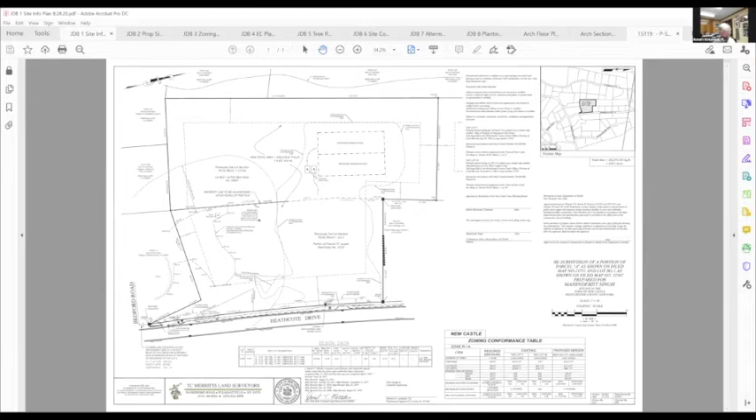Okay, so we're here. Jerry, do you want to, or who on the team wants to lead off and bring us up to speed? Brad, do you want to do that, or? Terrific, Mr. Chairman. I'm glad to do that.

And good evening, everyone. Good to see you. For the record, Brad Schwartz from Zarin and Steinmetz, representing Dr. Singh, and I'm joined tonight by Dr. Singh and his full team. Mr. Chairman, I will turn it over to Jerry in a minute or two to present the plans in detail. I just wanted to spend a minute reminding everybody where we left off at the July meeting.

The planning board had asked us to look at moving the house forward towards Heathcote, and we've done that. The house is now 30 feet closer towards the road as the board had requested. It's essentially in the same location as where the board had approved the location during the TAVO application about 2 years ago. So we're following the prior precedent that was established by the planning board during the TAVO application. And Mr. Curley had also asked at the end of the meeting that we also respect the same clearing and grading limit line restriction that was previously adopted for the Bukowski application a couple of months ago. And we've done that too. So there's no clearing or grading within the 50-foot rear yard setback.

We've come tonight with this plan, really trying to put our best foot forward. All transparency with the board, we had initially considered moving the house forward just 15 feet, and we thought that might accomplish the same objectives. We met out in the field with one of the neighbors, did some more internal review and listened to the feedback, and considering the TAVO application, we just decided to come back with a 30-foot difference tonight. We didn't want to come back and talk about 15 feet tonight. So again, we're putting our best foot forward, and we hope that the board and the neighbors are all pleased with the updated design. So Jerry, if you want to take the board through the plans in greater detail, I'll turn it over to you.

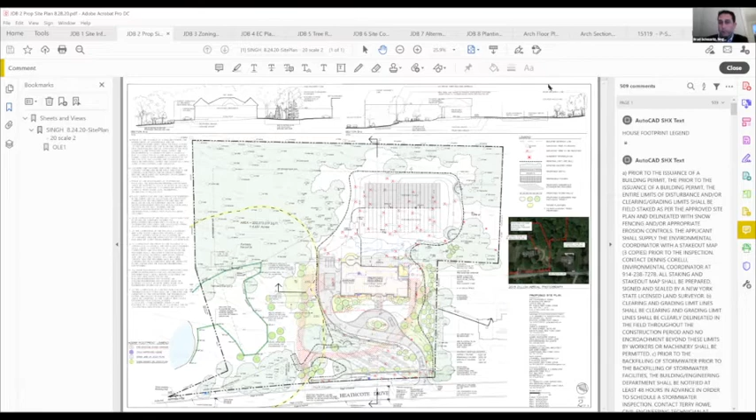Thank you very much. Okay, so I think, Brad, that was a good summary. I think that last time with the board, we had made some progress, and in the end, it came back to this 30-foot thing. So what we did was, the last time the board saw the project, the location of the home was in this area, and we've moved it up to the 30 feet. And I tried to make that clearer on the zoning plan. So the zoning plan, we've keyed the home locations. So where we are now, of course, is this highlighted plan. The Tavo plan is in this B, this D and B. So you can see they're kind of overlapped on each other.

Last time we were with the board, we were presenting Plan C. We were back here, C and C. And of course, the original homestead was about this area.

So that's what we brought forward, working with Dr. Singh. He said, if you make it work, I'd like you to make it work. I'd like to be a good neighbor. I'd like to make sure everyone is comfortable. Just try to make the plan work.

So we worked it through several times. We had to explain to Bob and Sabrina the domino effect - once you move the house 30 feet forward, everything else has to move too. So we had to basically take apart the site plan and put it back together again.

So what we've done is we've kept our same curb cut location, and we swung that driveway. We had to tighten up this radius. It required about 125 feet of low wall - maybe 2 feet, getting to 4 feet in the middle, then back to 2 feet again.

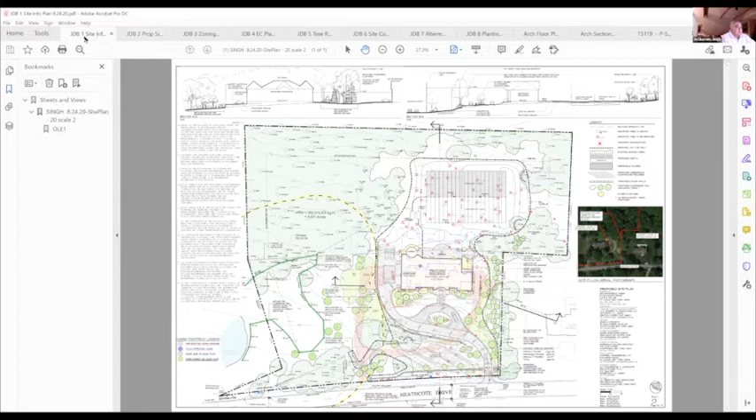When we were out at the site with the neighbor, we were able to take some views to see what this might look like from the neighbor's perspective, to try to be a little more sensitive. So we did provide some photographs of what the views might be.

So view number 4 is looking onto the property, and views 3, 7, and 6. These are the views - this is view number 6, the view to the Singh property from the adjacent property. This is standing with our back to the garage, looking at the Singh property.

There's already a little bit of screening going on there, which is good - it gives it a nice buffer. There's some nice tall trees, as you can see, that help frame it. We're keeping a big 48-inch maple back here, or oak, sorry. So I think we've got a nice high canopy of trees to kind of frame the view of the house, so it doesn't really stick out, but it's going to be framed.

And then, of course, we're filling in with fencing here, and filling in with all the plantings - the previously proposed planting plan that we had worked on and discussed with the board, where we've done quite a bit of planting here to create kind of a naturalistic hedgerow of various size spruce trees.

I think we go up to 12 to 14 feet in some areas, 10 to 12s, 8 to 10s. And then we mix that in with some smaller trees, some dogwoods and tupelos, and then some larger shrubs, the lilacs and the viburnums, all being that it's going to grow into a nice, dense, natural hedgerow, and then it ties into this big grove of natural trees.

Also, Jerry, wasn't there an architectural change where you moved the patio that was on the eastern side of the building and flipped it around to give a little bit more privacy to the neighbor? Sure, I'll get to that in a second.

So we still felt that, because we were shifting things around, we said, well, where is this fence really needed? And we felt it was really needed right here. So we still have 125 feet of solid green, 6-foot height fence, stained solid green. We do this quite a bit - we use that solid fence and stain it dark green, forest green. Once you put the plantings in with it, it really blends nicely and creates a nice screen. So we still have 125 feet of fence here.

This is just a view to natural area here, and this is pretty heavily planted here and here, and there's really nothing in here. We didn't want the fence, so we looked at it, and the fence stepping down the hill doesn't really look very attractive when these things, they don't rack very well on the hills.

Is that a wood fence or a plastic fence? It's a cedar fence - a solid cedar fence, stained forest green.

So the other thing we noticed, and we were trying to be sensitive to the neighbor - in the original proposed second floor plan, there was an outdoor balcony area. This was the original plan here. So what it was, it kind of opened up - there was a bedroom here and it opened up and you had this balcony. And when you looked out on the section, this would be, it's right here. So this was the balcony and it happened to be looking due north.

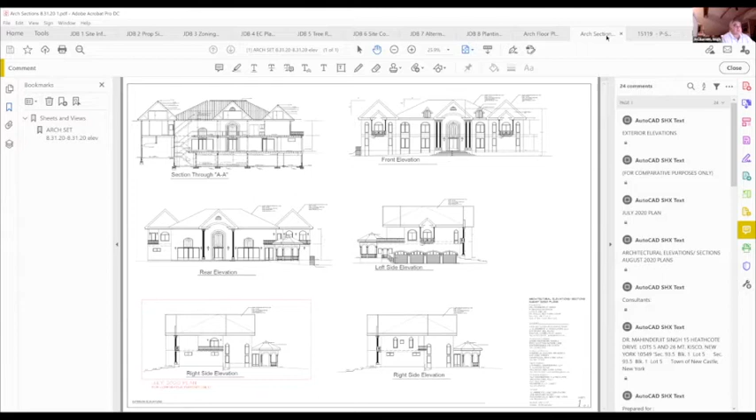And because we went 30 feet back toward the street, now we're looking right toward the Rodriguez backyard. So we said, well, why don't we work with Dr. Singh's designer, and said wouldn't it be possible if we could turn this and make it look out over Dr. Singh's backyard instead of the neighbor's backyard? And he went back to the drawing table and came back with this - so this is how it is now. Now you come out of the bedroom and you sit on the patio and look out to the backyard. This is how it was before - it looked that way to the north. Now we look only to the west. So I think that works better for everybody.

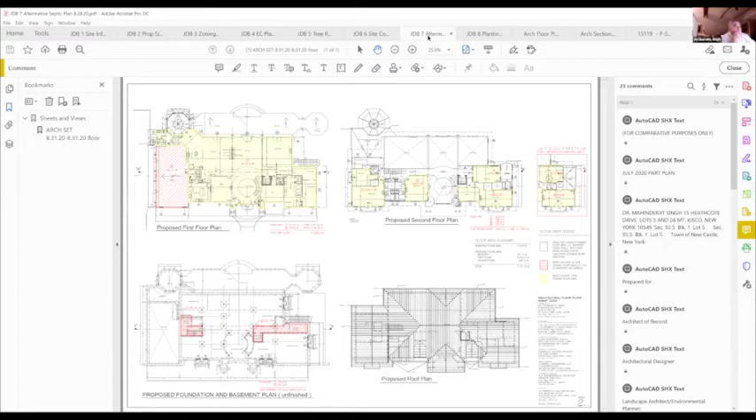Let's see - comparisons, we can talk a little bit about the comparisons. What do we got here? Jerry, you might also want to mention the location of the primary and expansion septic areas. Yeah, so...

This was the plan that we worked with the planning board prior on this, and this was something that was brought up - what would happen. When Campbell Engineering first did this, they had the primary here and the expansion area closer to the house. I think Michael explained it because that's where the locations of the holes were. But we can go back and do more holes, and we could switch things. So we went back and said, well, what if we switched it, and what would that do? If we did that, we would be able to only build the primary area here. And then we would be able to save all these trees in the back.

We would tighten up the grading limit line. So this would be the expansion area that wouldn't necessarily need to be built. We think it's a good candidate with the health department to allow that because typically they like to see you have access, and we have access coming right over the backyard and right to it. So I think it's a good candidate for that, and Dr. Singh is perfectly willing to do that.

Okay, so this is our site plan comparison sheet that we updated to show the new layout. We had been doing this right along with the planning board to say, this is what was approved at the time that TAVO came in, this is what is proposed now, and how does that change?

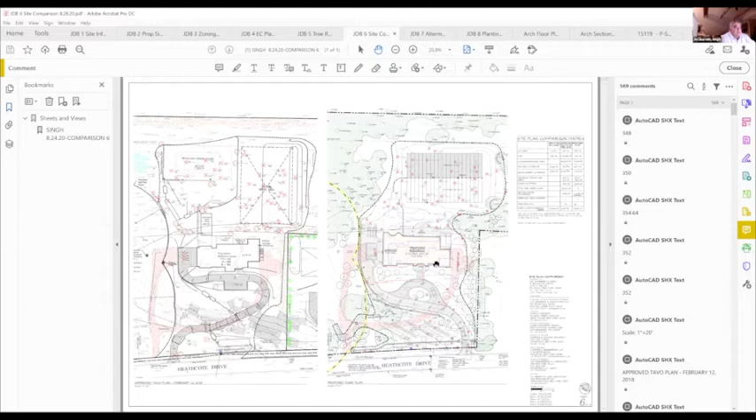One of the things you can see right off the bat is that we have a much tighter grading limit line. Theirs was much more extensive because they had the tennis court and the pool. So that was a significant change - we actually have less site disturbance than the last plan.

FAR, the TAVO plan was at almost 10.4. We're code compliant at 7192. Theirs was not. Clearing and grading area back then was 86.8, and we're at 71.2. So quite a reduction in disturbance area.

Our building coverage went up - we did go up with the building coverage, we have a wider footprint. Our development coverage, however, went down from 20,400 to 17,000. Our driveway length went down. Our house footprint went up. Of course, there's no tennis court and pool.

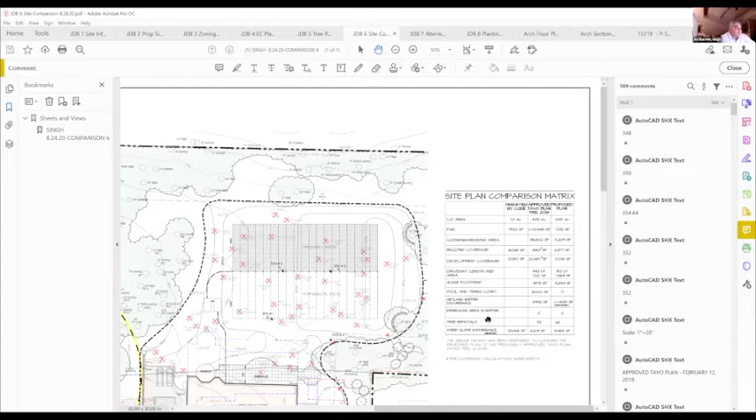Wetland buffer disturbance, ours went up slightly, and that's because Allen has to overflow - it's a wetland buffer disturbance. There is no wetland disturbance on either of the plans. What this area represents is where the infiltration chambers have an overflow, and he's got to get the overflow down to the grade so it flows by gravity and releases itself should they ever need to overflow. That's what this is. We consider that a temporary wetland buffer impact, because once that's installed, we're going to go back and plant that.

But our tree removals did go up over the TAVO plan, and since the last time this board saw the plan, it's a couple more trees for the driveway. Our steep slopes disturbance actually was reduced, and that's because our driveway approach didn't take up as much of the steep slopes.

So Jerry, where are the additional trees being cleared from? Why is that? It seems like most of the impacts are less, so I'm just interested in knowing where that is coming from. So what happened was when we moved the house forward - again, that domino effect.

I moved the house forward, so I had to move the driveway forward. Previously, the driveway came in like this, and it tracked here, and then swung in and came in. But now the house went 30 feet forward, so the driveway went 30 feet forward too. And then I clipped this 6-inch hickory here, and I think this is a holly over here. So I hit these two trees because I moved the driveway forward. I don't think either one of them are great specimen trees, but it was unavoidable.

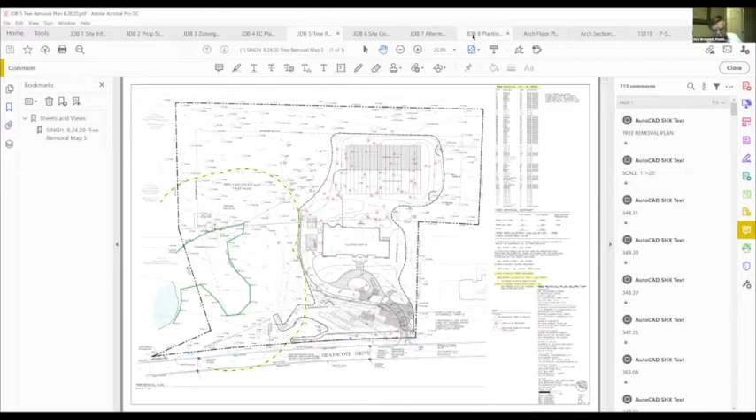I see, okay, thank you. But we have a lower tree count for at least the short term, maybe 20 years or so, because we're going to build the primary septic system closer to the house as opposed to farther away, correct?

So Jerry, I'm confused about what the application is, because you did show the alternative - I thought you were saying you could do that if you got the approvals. I think that's the one we're saying we prefer, especially because of the point Dick just made about saving maybe 10 trees. If you take the one in front as the primary and hold off on the one in back, maybe you save less than that. But I'm confused about what application you're asking us to approve.

Which plan is it? Well, I talked with the septic engineer, Michael Campbell. He cannot go back to the health department to finalize the septic plan until we have the merger of the lots, so he's waiting to do that. Then Michael Campbell needs to get approval from the health department to allow this. Typically that's after the planning board grants an approval, then he'll go back and make that request. And if granted, which we think it will be, then we will build the preferred plan. I think it's to everyone's benefit to do it.

So I think we have to go forward in the permit process with this board with the whole plan. And if we get that waiver from the health department, then we can move forward to the preferred plan. But where's our protection in that? Can we memorialize that in the application, how do we protect ourselves in case something happens? Mr. Curley, that could be a condition of approval - seeking health department approval for the plan that your board approves.

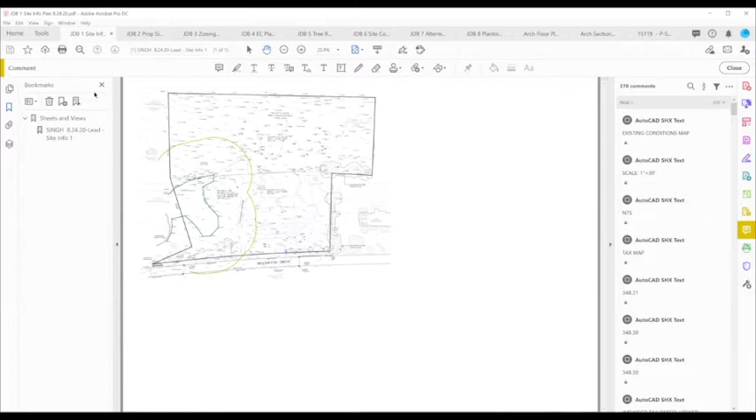That might be helpful for a visual, and that photograph that was on the plan. So let me just blow this up a little bit.

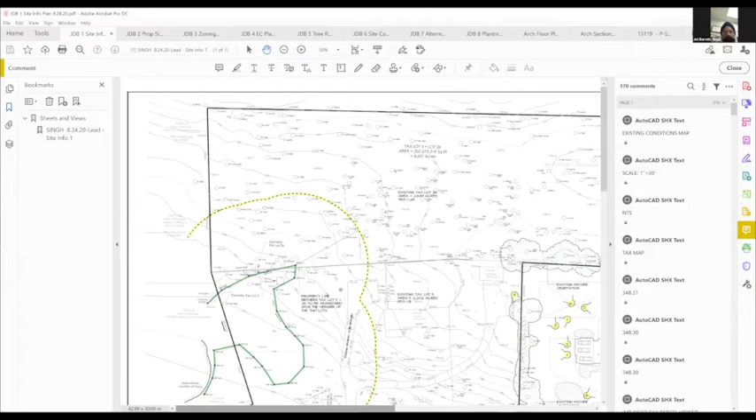So the fence would start right behind that first tree, and the new home is right here. So that was the idea. This group of trees right here, right where this hedge ends, that's where these groups of trees are, and this is where that opening is. Just to give you guys a sense of scale, ladies and gentlemen, excuse me, this is a 6-foot person standing here, so these are big trees.

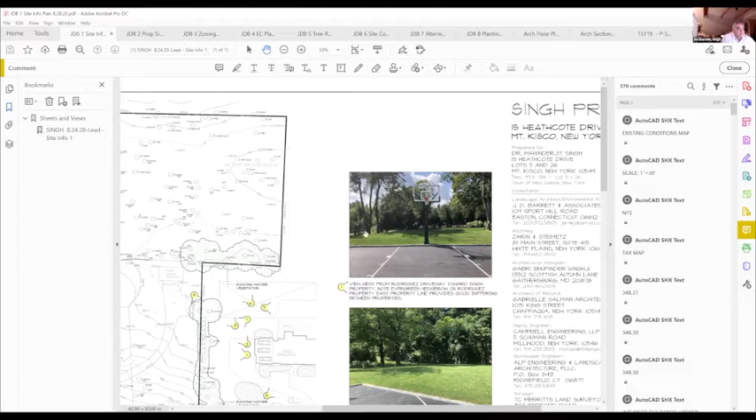So when I talk about the existing trees providing that sense of framing the home and that established look, that's what I'm talking about. We've got some nice trees, but this is the hedge, and we thought that this was pretty much screened. The driveway is going to peel in this way and go out that way. So that's why we started the fence here, because you do have this nice evergreen dense screen there.

Plus, if you put a fence up there, you might actually block the sunlight on those trees, and you might start to lose some health on that one side. That's a good point too. The sun is tracking from the south. Right. And thank you for that.

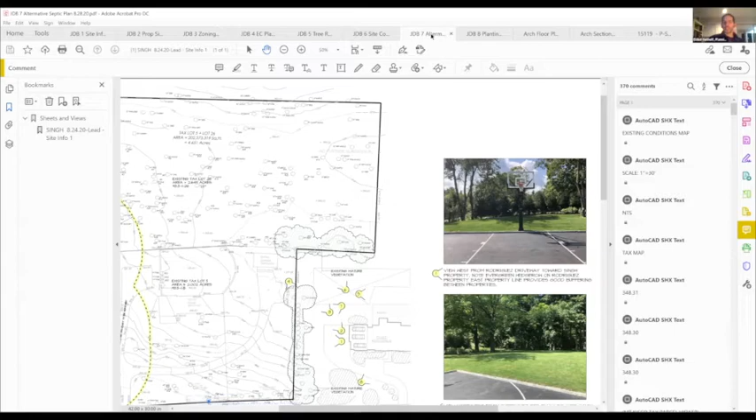The second question I have is possibly an internal question. We're talking about approving the preferred septic fields plan, and if the applicant can't get the approvals they want from the county, they'd have to come back to us to get approval on the other septic fields plan. Is there a way we can—I think we're all on the same page that were that to happen, we would approve it at that point—is there a way that we can just approve that now, sort of like a ranked choice voting sort of thing, that we approve both plans but really have a preference for this other one, and would implore the applicant to seek that approval?

Well, that's interesting. Sabrina, maybe you can help on this. First of all, if we have this approved and they come back and they have to, let's say, just clear additional trees, could that just go to Dennis and not to the planning board as something new?

I think that you would approve the max, we could write the resolution where you would provide approval for the maximum removal of trees, because your mitigation plan should reflect the maximum removal. And if in fact the county does approve of the alternate plan and not clearing of the secondary system, then the permits would still be valid. It would be less trees.

If you approve the plan that says that there will be less tree removal, then they have to come back for a new permit. In the past, we have approved the entire clearing, but the resolution notes that you want them to not clear the secondary system, and leaves it in the hands of the applicant in working with the health department and informing the town of that approval.

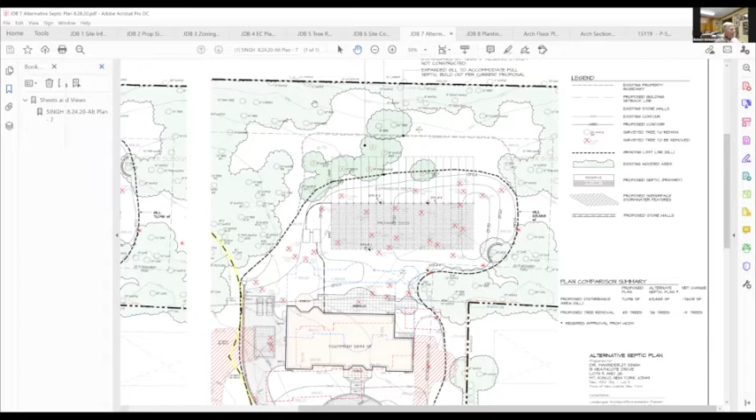In the meantime, as we think about that, are there any comments from the public on this application? Michael Surignano for the Rodriguez family. Thank you. Good evening. I represent Michael and Maria Rodriguez. They're at number 19 Heathcote Drive.

Michael was made to understand from Dr. Singh early on in this project that the front of Dr. Singh's new house would align with the front of the Rodriguez house. And in fact, as the board knows, this street, starting with the Rodriguez house on that side of Heathcote, every house going the rest of the way up the street are uniformly set back at about the same depth as the Rodriguez house. So the Rodriguezes were very concerned when the first iteration of this plan came before your board, because the house was way in the back, pushed up, and basically loomed over their backyard and was a real threat to their privacy and enjoyment of their backyard.

I'll leave it to Brad Schwartz or Jerry to give you the details, but it's my understanding that the house started to get pushed back away from the road as part of a zoning board discussion or variance application. I don't know the exact details of that. But as Brad noted in his opening, we did meet with Brad and Jerry Barrett at the site. Dr. Singh has acted in good faith here to try to accommodate our concerns. Certainly Brad and Jerry were receptive to my client's concerns. And we appreciate that they have now pulled the house closer to Heathcote by 30 feet.

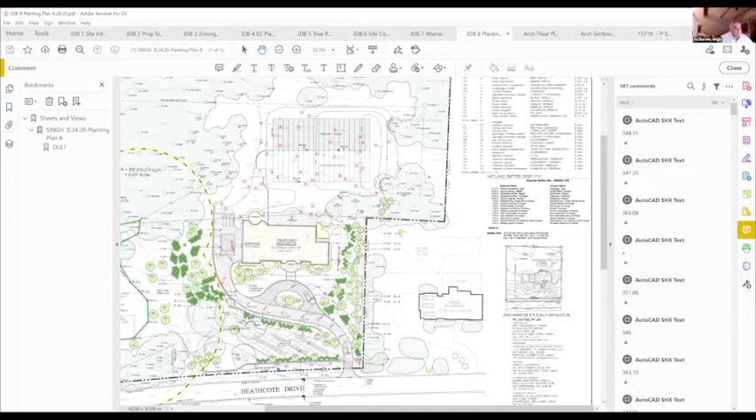We've tried to be sensitive with this. This is all planted in this area, and this is all permeable paving here, so the water's going to go right through it. It's something you could see is normal and customary in the neighborhood.

This is a parking area, a similar feature for the Rodriguez house, not quite the same, but it is kind of a parking area. If you look at the next house down, there's another one right there. So it's not an unusual feature, it's more of a common feature in these homes. Perhaps this is a little bit more elaborate, but also much more functional.

It's something the applicant would like, and we think it can work. We think we're still going to be able to get some planting in here and buffer this, we have quite a bit of planting in here. The Rodriguez has these nice evergreens, got to be a 30-40 foot hedge right now, and when we plant in here, I don't know that the jog is that much.

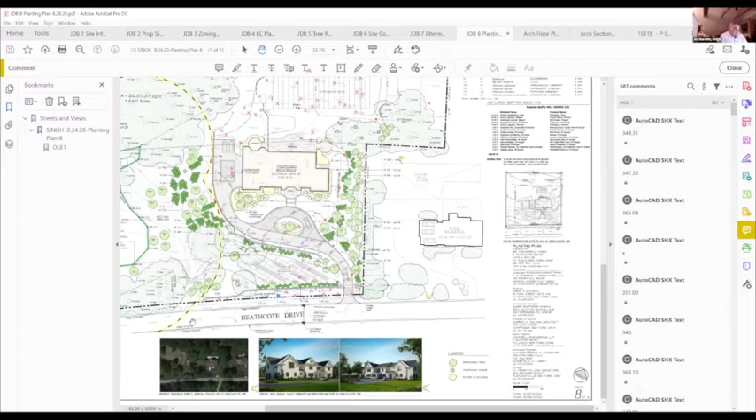Changing that architecture now to look out this way, the fencing, we think we've got a good compromise here, and I think I speak on behalf of Dr. Singh that we would respectfully request we keep that in the plan.

I would add, Jerry, that another feature from a privacy point of view, beyond the fencing and the rather extensive vegetative approach, is that you turn the patio so that instead of viewing to the Rodriguez house, the natural view and everything would be to the west, which is actually better for setting suns and everything.

Are you referring to this area? Yeah, we could certainly do that. I started a hedge here, and I could bring this hedge all the way around. This could be a 6-foot solid hedge. It would be a nice little alcove, and it would look right out. So we could certainly do that.

But we got a 6-foot fence here, we got evergreen trees, and I think there's a pretty good buffer here. But I think that's a good point, and I could certainly change this to an evergreen hedge that could wrap this and make a nice little alcove and private sitting area for reading, or a little nook on the patio with a nice view to his backyard.

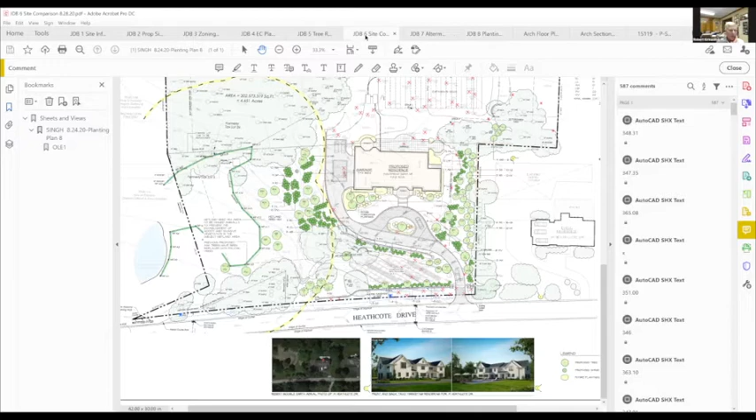So what would be the status of Dr. Singh or some future owner of this property's ability to put a pool or a tennis court in the rear portion of this property? Well, I think there would be a couple of protections, and that would be first zoning compliance. But very importantly, I think this board will be drawing fairly tight clearing and grading limit lines.

Well, and the other thing, didn't we do something with Bukowski that said no permanent structures are to be built in the back lot? Well, no, we didn't say that. We said that if there was going to be a future application, it would have to fall within those property lines. Remember with the other application, I think the property lines protruded over two sides over the neighbors, and certainly to one side far more extensively, with far more potential for development than we have with this lot. Dr. Singh's lot does, if merged, protrude over the Rodriguez property, but to a much lesser degree than the other application. So again, zoning compliance really would be a problem for any application for activity in that section.

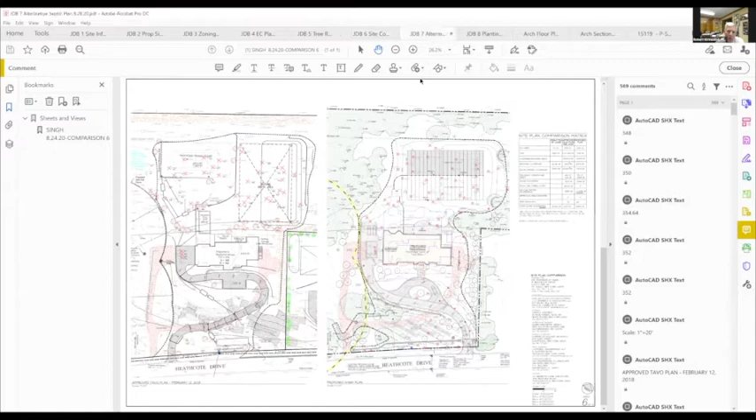Plus, we also have clearing and grading limit lines that we are drawing, and that will be memorialized on the plat. So I think those two issues would afford a certain level of protection. Certainly, the clearing and grading limit line would require a revisit to one of the boards for that application. So I think those are distinctions from what we saw last time with the other application.

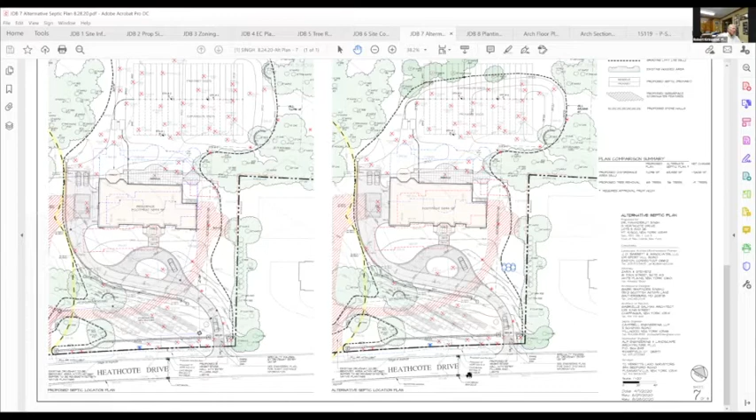And what we did there was, I can't do it myself, but we drew in the protection so it had to stay basically behind the home, and stay within the lot lines, the east and west lot lines of the property in front on Heathcote. All right, points well taken. Thank you, Mr. Chairman.

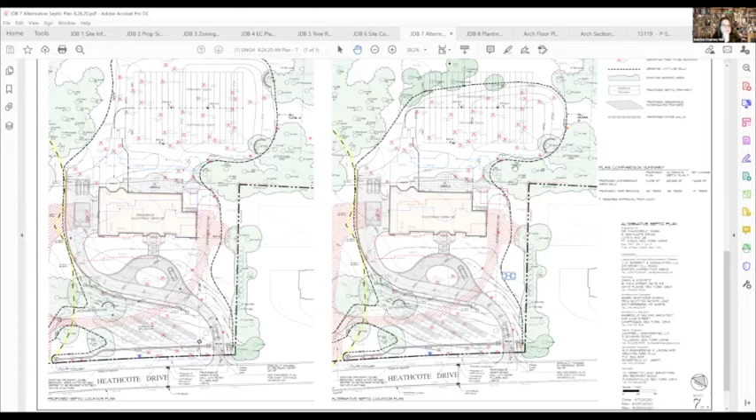Okay, we move now to our second item, and that's a discussion item on Lamini, Sorrel Street, can't find my agenda yet, so I can tell you exactly - application for steep slopes, stormwater and tree removal for legalization of unauthorized steep slopes and wetlands disturbance, 402 Sorrel Street.

Good evening once again. Brad Schwartz for the record from Zarin and Steinmetz. You'll all remember when the board granted the last extension, you asked us to come back within six months for an update. So we're here tonight to provide that update, and primarily Alan will be updating the board with respect to his efforts with DEP over these last few months. The second item is more of a procedural point that we're hopeful, as you'll hear from Alan, that we'll be getting DEP approval shortly. If we do, the applicant is willing to move ahead with the Sorrel Street improvement work later this year as phase one of the project, while waiting for spring to do the site work.

We know the Sorrel Street work was also of critical importance to the board, so we're mindful of that, sensitive to it. And if we get our DEP approval, we're happy to move forward with that road work later this year. Because procedurally, the way the resolution was adopted, all the conditions were folded into one resolution as part of one overall project. So the board procedurally just might need to authorize staff to work with us in terms of getting a road opening permit to do the road work in advance, assuming your board is amenable to that idea.

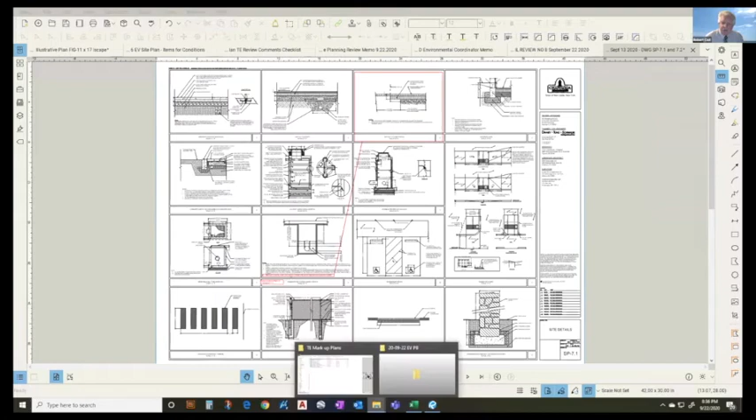You're going to bring up the sheet SP7.4—that's the one I'd like to talk about. Just so the planning board knows what I do right now, I think it makes my life and their life a lot easier. I use their PDFs, and I put all my comments on the drawings the old-fashioned way, which I used to do 20 years ago. So I just put it on PDF, and I think it's easier.

So let me start here on SP7.4. I don't want to spend too much time on it, but let me show you what I'm doing—annotate, draw. You see these four areas, five areas?

I'm concerned with the overflow, because this overflow basin is going to come down and overflow right here. I want to make certain that when it does, these structures I boxed in can handle the flow, because the last thing I want to see is this thing get clogged up with the overflow on the left side and then flow out to the street. So I've asked them to do a hydraulic analysis to make certain the existing structures can take the flow when that overflow weir is used, because if they don't, it may possibly go into the street and then down to the wetlands, which would not be a good thing.

So that's a pretty critical comment they should address sooner than later, which is part of the stormwater comments. That's ST1. The next one I'd like to go to is comment ST5.

Keep the same one up there, Matt, because it applies to the retaining wall. Basically, let me draw—right here, guys, about a 75-foot retaining wall. I think it ranges anywhere from 5 to 6, 7 feet.

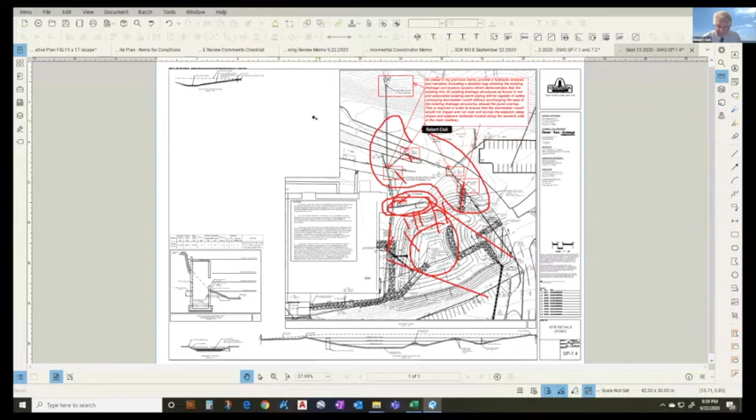I just want to make certain they do their due diligence, and I outlined it in ST5, to do the structural analysis—which I think they retained a consultant to do—to make sure that the surcharge from the water and also the surcharge from this additional fill will not overtax the way the system and the wall was designed previously. That's critical that gets done, because there's a possibility, worst case scenario for both ST1 and ST5, that they may have to rebuild this system to take into account the flow, and this wall may have to be rebuilt or at least structurally reinforced based on whatever the engineer comes up with.

So those are two big items.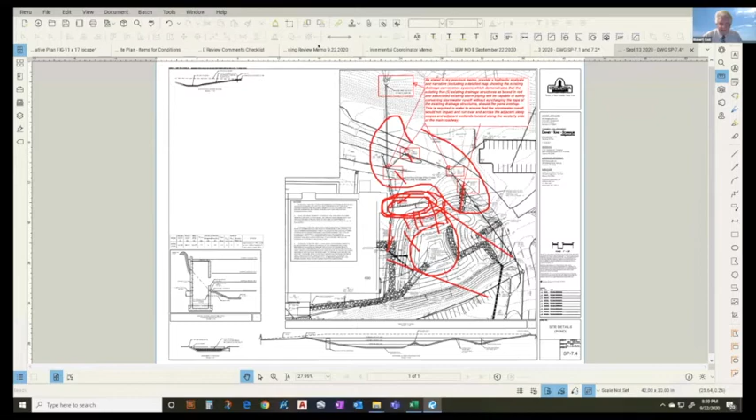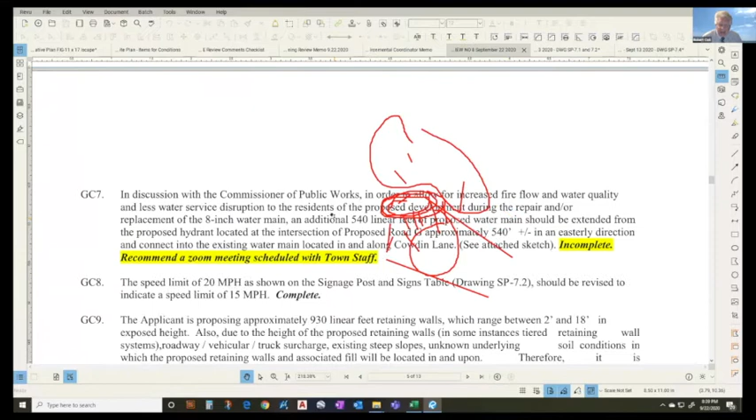The next one is GC7 on my comment list. I got the distinct impression that the applicant has some concerns about it. Basically, it has to do with the water main, that in discussion with the Commissioner of Public Works, would like to have another tie-in point coming in off of Cowdin and going up in a westerly direction to hit one of the new roads on the East Village. They're pretty clear in their response that they don't believe it should be done. I would recommend here, I'm going to pass the buck to the commissioner and meet with staff internally and town council, and then have a meeting with their attorney and their staff to see how we can resolve this, if at all. So that's GC7. Right now, I can't say much about it.

Before we leave that, it's important to know that the board has looked at this a couple of times, and while we haven't weighed in on the detailed engineering aspect, the board has indicated to the applicant that it favors the loop for emergency services, for flow reasons, and the reasons we've heard from the commissioner of DPW. So if there's some sort of change, that's something we should hear about. But the applicant should understand that, at least in our discussions, the board was leaning towards supporting the commissioner and seeing that loop completed.

Thank you, Robert. Once we have our meetings, I'm sure either the applicant or town staff will prepare a memo for the board to look at, to see what our findings are, to keep you guys in the loop. So that's what we'll do there. And just so the applicant, the engineer, the attorneys, and Felix know, I will schedule a meeting with that probably next week, so everyone's on the same page, and it'll probably be a Zoom meeting. And that handles that comment.

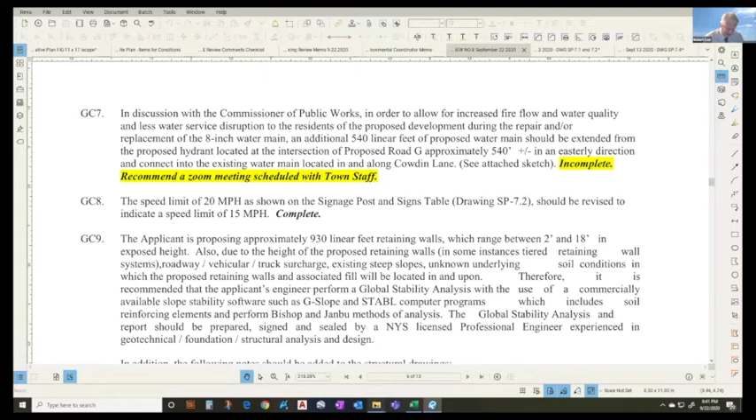The next comment I'd like to see, which is 4 out of 5, is NC1. Matt, it'd be helpful if you can bring up Exhibit 5, which is MPT1, so the board can see what we're talking about.

I think that all in all, they presented a nice conceptual layout of how they plan to do the MPT plan during construction of the loop road to make certain. This was a town board request as well, and they looked at this quite closely. I'm following their guidance on what the applicant should do. So they presented a nice conceptual plan, and in general they plan to guide traffic through the parking lot during construction of the loop road, which is the only practical place to run it, but they have a nice guideline of what they want to do.

I'm just looking for more technical details on it. So all of these items in my red boxes are really just more detail: basically a sign plan, clearly demarcate the designated route in the parking lot for traffic, put up more detour signs, more detailed construction signs. So when it is enacted by their contractor and we go out to inspect, we have a clear idea of what they're doing. But in concept, I'm comfortable with the goals the town board had intended. Of course this has to be looked at by the police chief as well, but I think they did a good job on the conceptual layout. So a lot of my comments are technical comments to bring it to the next level, and that's what I try to outline and get across to Felix's team doing their plans. That takes care of NC1.

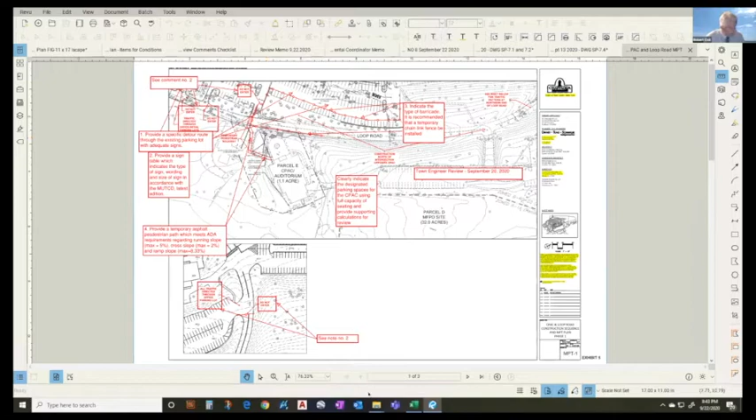I do have a comment also, which we can keep the same up though. On the auditorium, they did a nice job showing what they're doing out there, but I just want to make certain - and this refers to you guys, Andy - on the auditorium, you've got to be very clear on exactly the utilities, because I had discussions with Jerry Marshall and their building department, and I think we might have to have a meeting on this internally to go over it.

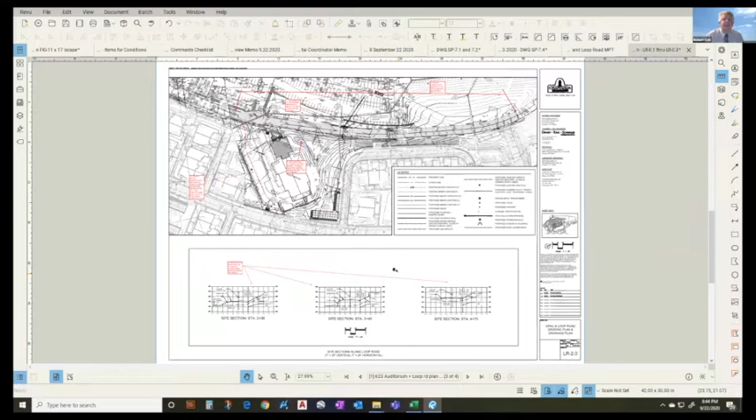But we want to know exactly where your tie-in points are and what you're doing and what you're not doing, basically with the utilities, i.e. gas, telecommunications, water, sanitary, and stormwater. I don't want to bore everyone's time now with the nitty-gritty, but I think it would be good to have a meeting with some of your staff, Andy, to see exactly how this is going to be handled in the field and during construction, the stuff we have to do and the stuff you have to do when it pertains to all of the utilities. There are several utilities out there, so it gets a little bit involved, but I think that could be handled at a staff level meeting. Do you agree, Andy?

Yes. We'd also invite Dave Walsh, who knows the area around the auditorium in great detail. Okay, so I'll coordinate that as well.

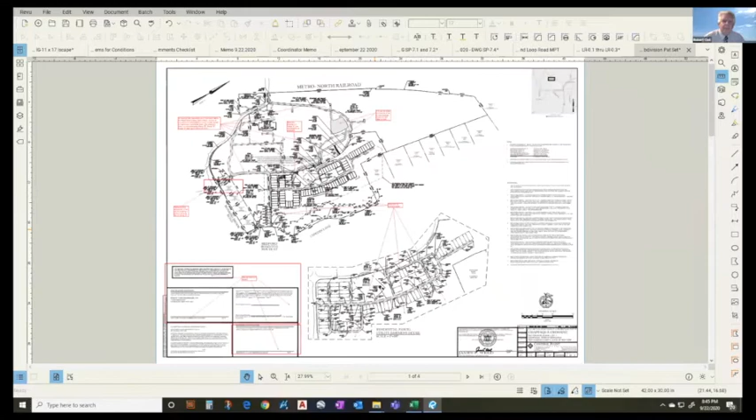Last comment I have is on the... yes, did someone have to say something? Andy, or no? Okay, my last comment of the ones I felt were important is, Matt, could you pull up the blow-up version of the subdivision, preliminary subdivision map? Could you zoom in, Matt? Let me show you. Could you zoom in an area like on one of these streets, like right here?

One thing I do know, and I just wanted to bring it to everyone's attention, if you notice, they have the water line and they have the sanitary sewer. Of course, all of this is going to be dedicated to the town. And I would imagine, correct me if I'm wrong, Andy, there's going to be water, there's going to be sewer, there's going to be telecommunications. Is there going to be gas, Andy? Yes, I believe so. Yes, there's going to be gas and there's going to be electric. Now, that's a lot of utilities to fit in a 20-foot wide road.

I don't know how you're going to do it. I would recommend when you get down to the detailed drawings, you're going to really have good detail on how you're going to do it. But one thing I did notice, and I don't know how good an idea it is, you realize that when you have these easements for the sanitary and water, which is going to be dedicated to the town, a portion of the easement right here is going to be on the private properties of those parcels. Now, is that what you intend? Would it make any sense, just food for thought, guys, to put the sanitary and the water in such a positioning and just have the easement in between the common areas, so we don't need easements over private lots?

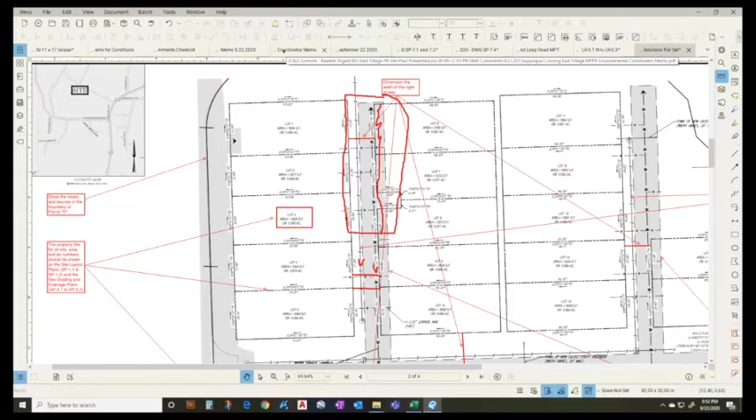Dennis, try to keep this hot topic of the males and females as general and G-rated as possible here. This has the potential of being one of the hottest planning board meetings ever. Wow, A, I'm happy that you actually read them, and B, I did bounce this off my wife - I've been married a long time - I said it's a public audience, I'm going to keep it G, and she basically gave me the 'you better.' So, having said that...

When I came upon this, even a little over a year ago, I know Steve Coleman had written, I guess, one of his last review memos for this project. And I know there was an extensive, almost redesign request for the berm area and whatnot. So I've taken more the approach - if you're reviewing my memos, they may even appear to be more nitpicky than anything, because I'm just making sure that I's are dotted, T's are crossed, and certain things I'm able to follow and make sense to me. So that's just reflective of my site plan drawings comments.

I thank the application team this afternoon for helping me address SP 9-1, because I did get that updated table, and that's now part of my files.

As part of the general comments, these are just some things that I point out. Obviously there's a lot of plants, a lot of planting locations, and whatever jumps out at me from review. And you could even look at the literature and...

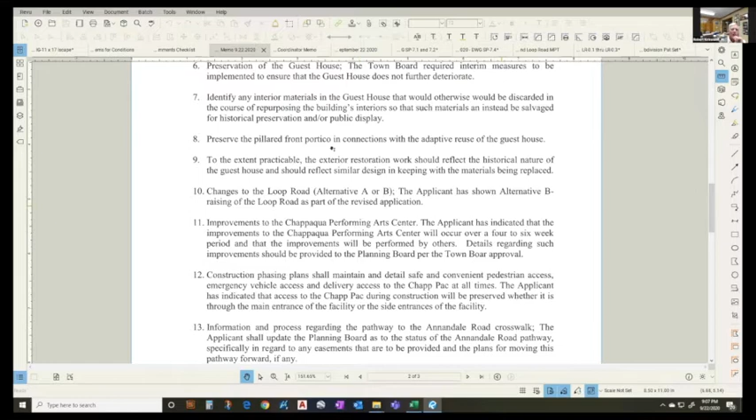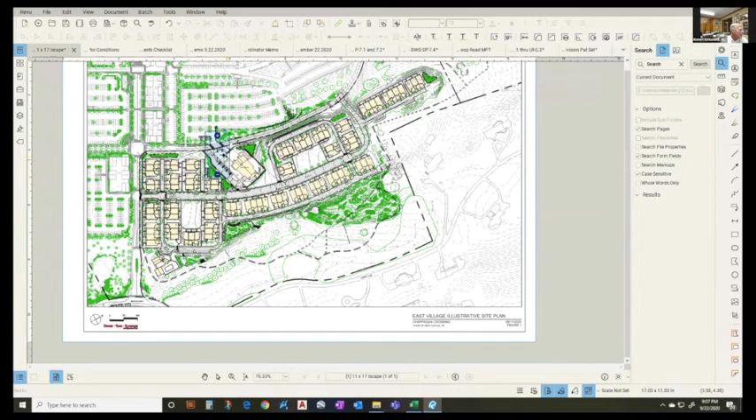Can we see a blow up of the area around the Chappaqua PAC? I'm no good at the Zoom stuff, so bear with me. One of the things you've changed, jointly with the town, is the configuration of the front steps coming in. The old slate steps are going to be pulled up and you're going to realign the steps, that's fine, that's great. My concern - it blew it up a little too much - but across the street, I still have this concern with the parking and the pedestrian movements to get to the PAC.

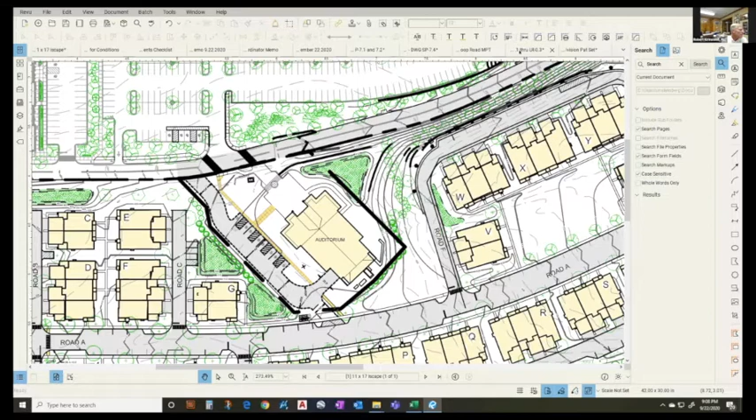I can't recall the lighting plan in that parking lot, but the issue is we're directing people from the auditorium to basically walk through a parking lot. I had mentioned before I was still a proponent of another loop going into the parking lot a little further to the north, at that cutout at the very end of the parking area that seems fairly level. I always thought that would be a good thing to have.

But aside from that, it seems appropriate to have some sort of pedestrian walkway from where that retaining wall is, matching up to that berm or grassed area, meeting up with the sidewalk along the road. Directing people out of an auditorium with a crowd and just having them walk amongst a parking lot doesn't seem like the appropriate solution. You have a sidewalk going south toward the village, but the sidewalk from the main stairwell just directs into one segment of the parking lot. So it seems we need something more in terms of design to get people out of the parking lot onto a sidewalk sooner to cross over to the PAC. By the way, my little loop doesn't really satisfy that issue.

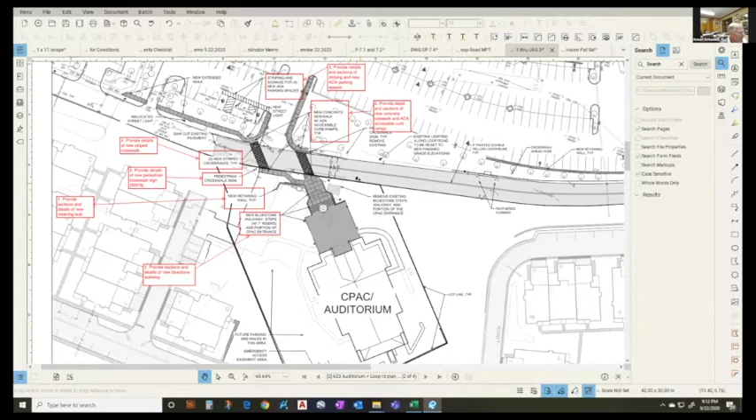Okay, and then further down to the north, you're saying that because of the change in the loop road elevation, the drop going back down is too steep - a little further north. Right, because that wall you see along the west side there holds up the raised loop road. So that would be too steep to get down to.

Okay, how high is that wall at the northernmost spot? I think we're raising the loop road 10 feet, so it's probably about 10 feet at this height.

Okay, and you can see the contours - as you get closer to the south end of that wall, it's probably 4 to 5 feet of grade. So I'm not sure you're gaining anything that you would not. I think it's an easier walk just to go down the sidewalk and then into the parking lot.

Okay, well, if you could look at that and see what the grades look like. Again, I always think it's better to have people walking on sidewalks rather than in the middle of a parking lot. And presumably it will be a busy parking lot either before or after a performance, since that's going to be the main parking lot. So if we can deflect some of that, it might be a safer approach.

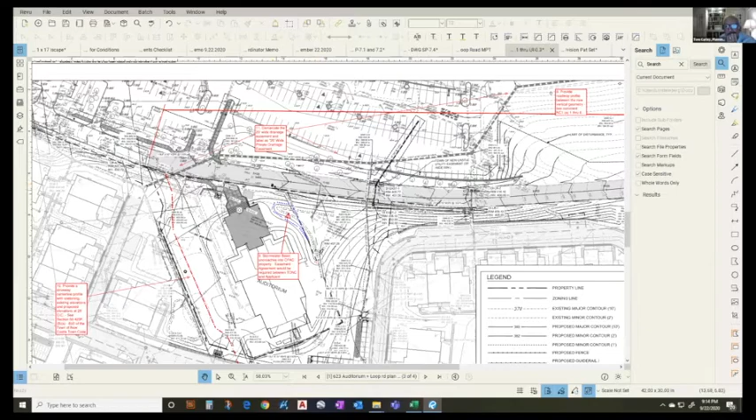So Bob, if I can, I agree with you. I know we talked about this before, and I understand raising the loop road might make this a little more difficult, and the farther along the loop road you go, the more difficult it is. But somewhere along the line, where it looks like this drainage line is going into the parking lot, right around in there, I think the finished grade according to the drawings - the crown of the loop road - looks like it's at about 406, and I think it's 402 at the parking lot. So I'm not sure this is something that can't be done. It just isn't done - it's done sooner along the road rather than later, and I think that's better anyway.

Yeah, I agree with Tom. I still like that idea. I think it has to be done.

I'm looking at this facility, and Felix, you tell me, but if I'm looking for a pad site for a use like this, and I've got a crush load for my events of people coming and leaving, and people dropping off at the front door, which they're going to want to do - they've got no recourse, they have to keep going all the way down the loop road and come back. If I was a tenant looking at a facility like this, and the parking lot is so far away down the slope, and people have to walk through the parking lot, make a left turn, and finally get up to the building and cross the road, I wouldn't take this site. It seems to me we need to recognize this.

Not even for $1? So Felix, tell me what it would cost. I just wondered - you don't have to answer, but it seems to me somebody saved you some money on demolition of that thing. Well, hindsight is everything - let's not have that discussion. Hindsight's everything, and it's a wonderful amenity for the city. But this has been a gift that keeps on giving, not in a positive way, to those of us who gave it.

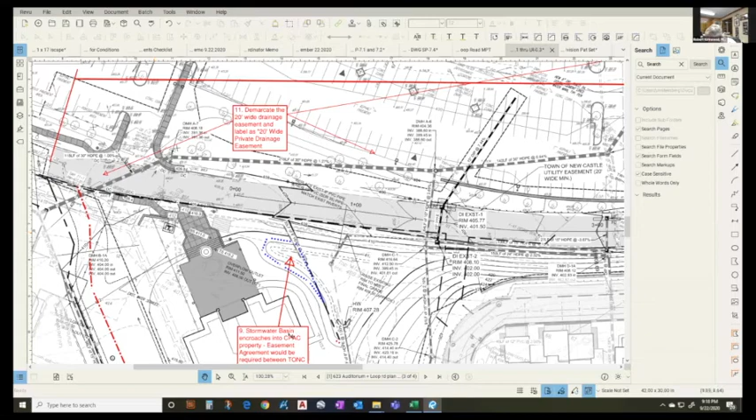Now, anyway, I think if Andy could take a look at those again, I think it would help us get this thing going.

Another way to do it is to somehow direct traffic to the auditorium through the parking area, so the cars can come through the lot and then drop the people off on the other side of the road, and they can use the crosswalk to get over there. That could be done with some signage, perhaps. That works. Okay.

Good. Any other questions or comments from anyone? Yeah, on the application? Sure, Tom.

I have 2 more. One has to do with landscaping around the units, and another has to do with, and I'm going to come back to this because I think it's a problem, the speed bumps on the loop road going back down to the Parkway.

We talked about the speed bumps before, and I suggested there were other ways to do it, which are probably the more appropriate ways to handle the crosswalk problem. You see them in towns everywhere. You see the solutions in Chappaqua: proper crosswalks with whatever lights are required in order to make that work.

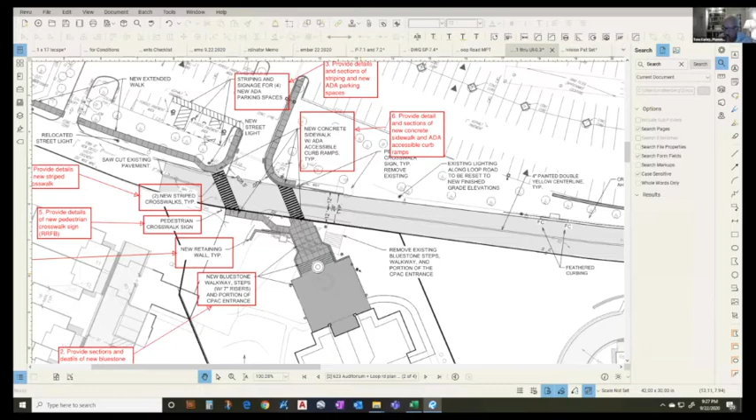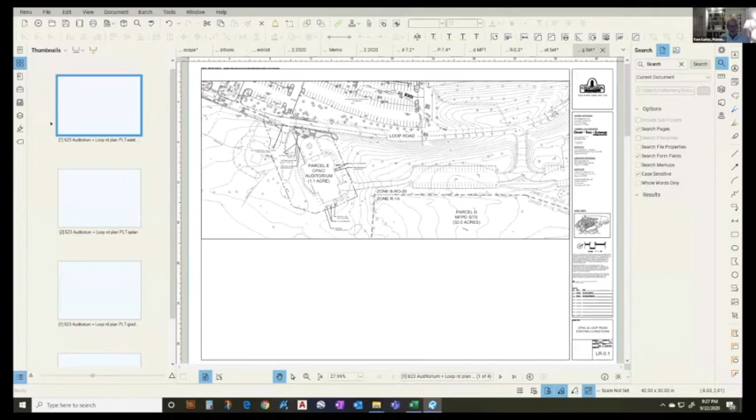But I do have a concern, and this may be a minor point for everybody but me. The design of the units and the neighborhood, Toll Brothers has done a really good job finding ways to put a product on the market which differentiates each unit architecturally. We shouldn't call them row houses, that's not a term used these days, we'll call them townhomes. In these rows of townhomes, you can pick out and identify a unit from unit because of the selection of materials and the architectural facade. It's going to be very successful, I think.

But the landscape in front of these units really goes against the grain of that. If we can get, I think it's sheet number SP47. There's a detail that shows typical landscaping. There, perfect, excellent, right there.

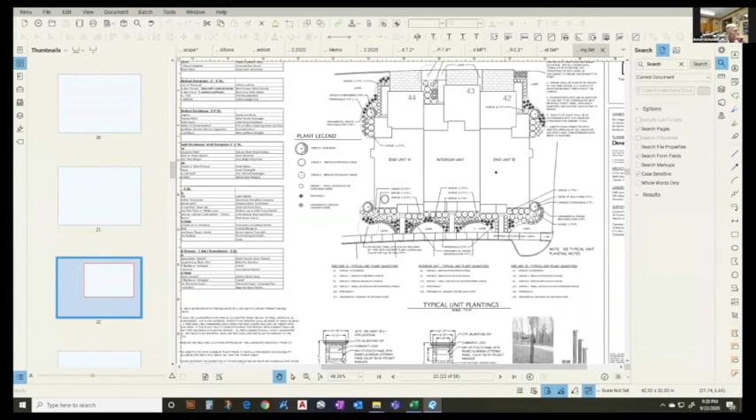Thank you. So when I looked at this, I noticed that if you look at the walks and the way the landscaping is done, and where the lawn area is, and where the building demising lines are between the units, you'll see that the lawn area is along the demising line. In other words, what you would expect to be lawn in front of a unit is actually lawn in between units. Normally in a townhouse development, the yards are separated by landscaping or fences or devices that demarcate the yard for the unit, and there is an association between the front yard and its landscaping and the building itself, and it presents a unified composition.

In this case, you've got this alternating pattern, which has the lawn where you would expect there to be a division of hedges, and hedges and a walk where you'd expect to be a lawn. It's like a counterpoint, which I believe is really going to detract from what otherwise could be a very powerful composition, help people further identify their homes and have a rhythm and a pattern on the street in the neighborhood, which makes sense to me, and I think to most people, because that's the way we build things.

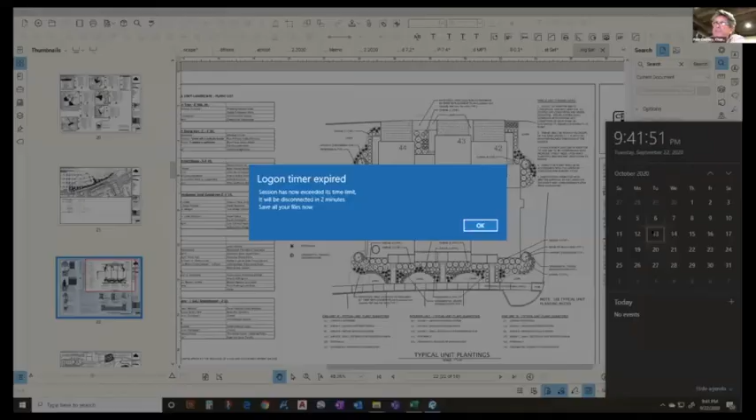The November 4th meeting, it's on the 4th due to Election Day. The deadline is October 13th. Andy speaking, obviously, I'll say we can make that. Andy, can you make the submission requirements based on the give and take between you and Bob and Dennis and Sabrina by the 13th? Yes. Okay, so that's a yes from our end.

Could we get a marker for November 4th? None of us have to go to the polls. We're all absentee voting, so we have nothing else to do that night. Well, you may even have weeks later to do it if you're late. I was going to vote in person, but I vote in person at town hall. So okay, all right, so we're going to save you. So that's going to be...

Can I suggest that it's November 3rd, I believe you're talking about, which is the Tuesday? That's November 4th. November 3rd is election day. So you do November... I and we thought you moved the meeting to a Wednesday. I got you, I thought you were saying it was the night of election day, so you've pushed it to the 4th. No, no, no, we moved it, yes.

Got it, understood. So if that makes sense for folks, we can pencil it in. Of course, if there's any problem or any kind of delay, we can move it 2 weeks further. But why don't we shoot for that? That'd be great, thanks Bob. We haven't had any delays, so I'm sure we'll hit that date right on.

How many shopping days are left, Felix? Well, there's plenty of shopping days, there's just not much shopping money left. That's good. Well, yeah, who leaves your house to do shopping anyway?